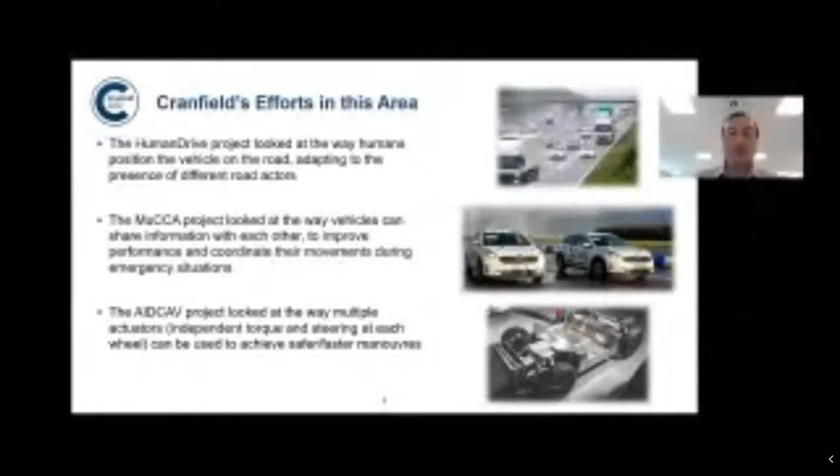And finally, we're going to look at the AIDCAV project, which looks at the way multiple actuators, typically controlling the torque and the steering at each wheel, can be used to achieve safer and faster maneuvers.

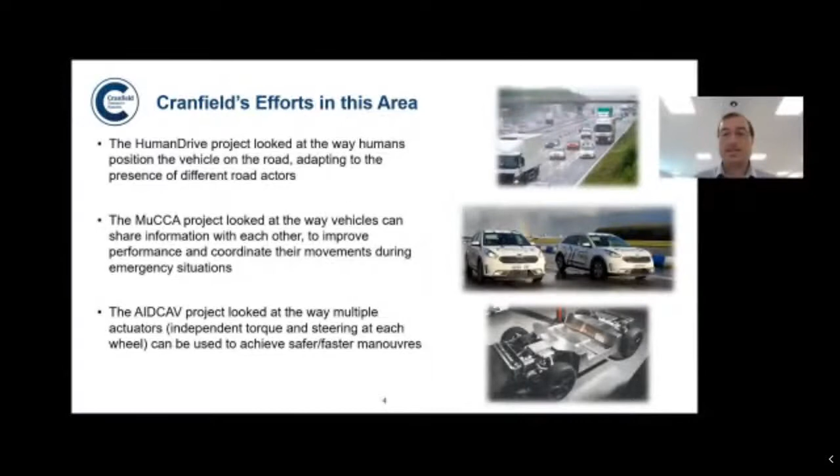So let's start with the HumanDrive project. This was a very large project that lasted for roughly 3 years and ended in March 2020. It was managed by a consortium of several companies, universities, and public bodies, with an overall budget of around £14 million.

The consortium was led by Nissan, and Nissan European Technical Center in particular, who led the development of the autonomous vehicle. The overall aim of the project was to develop an autonomous vehicle with human-like performance.

Hitachi, in particular, was in charge of developing the machine learning-based controller to mimic human-like trajectory planning and perception.

University of Leeds took advantage of their advanced driver simulator and ran experiments with hundreds of participants to understand how human drivers behave and to build a human driver model.

The Grand Drive was completed at the beginning of 2020, in the middle of winter, and therefore the vehicle had to deal with limited visibility due to reduced sunlight hours and all sorts of weather conditions, a typical grey winter day in England, as well as the many roadworks that characterize the M1 and the motorway system in general.

And of course, it was successful. You can find a video online with more information. The vehicle drove autonomously for almost all of the journey, apart from probably something like a couple of minutes along the whole journey when the driver had to take over in some particularly challenging situations, generally due to roadworks.

I'm going to show you a quick video that summarizes the output of the project. I'm going to enable the audio.

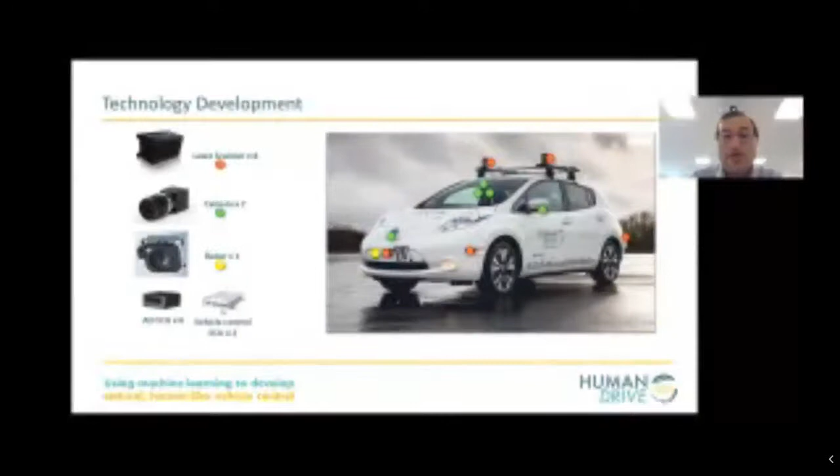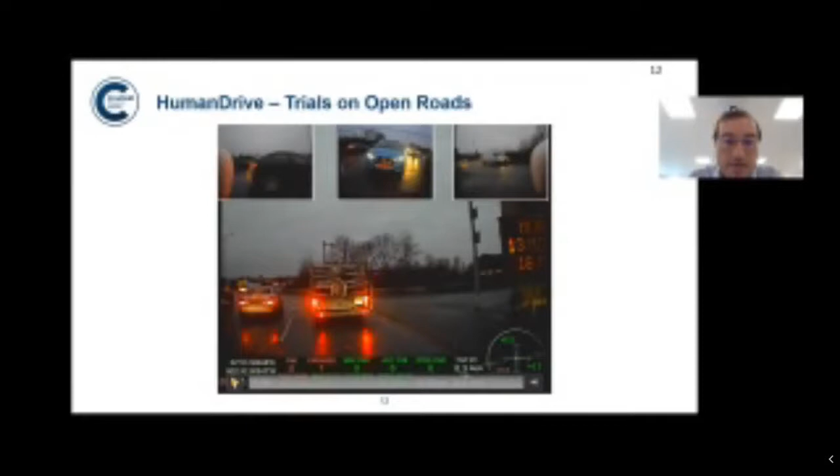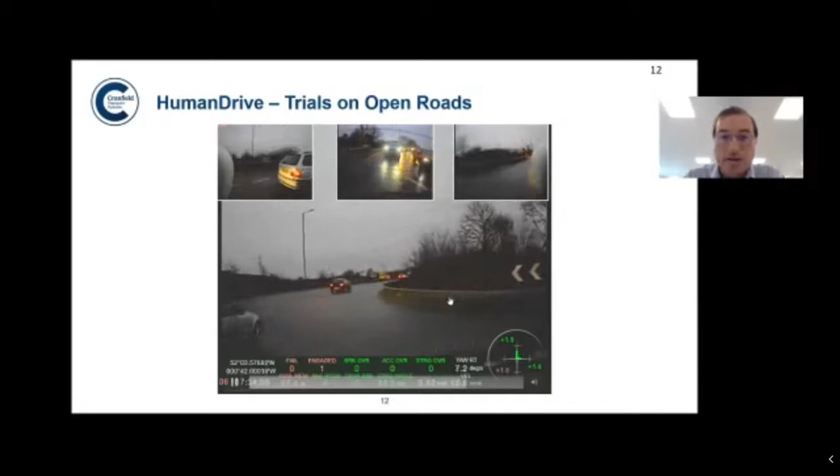I'll show you how the vehicle operates around a roundabout. This is a video taken during fully autonomous operation. If you keep an eye on the top right box, you see cars very fast approaching, going around the roundabout without necessarily indicating what they are doing. The vehicle stops, checks that the roundabout is clear, and moves ahead.

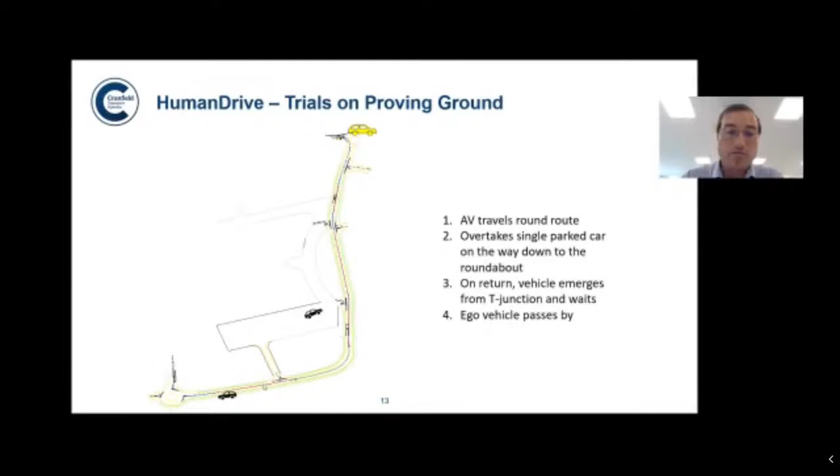Some of the interactions include a vehicle emerging from a T-junction, or overtaking a vehicle that is stationary in the middle of the road. We also had interactions with pedestrians crossing in front of the vehicle or moving along the vehicle.

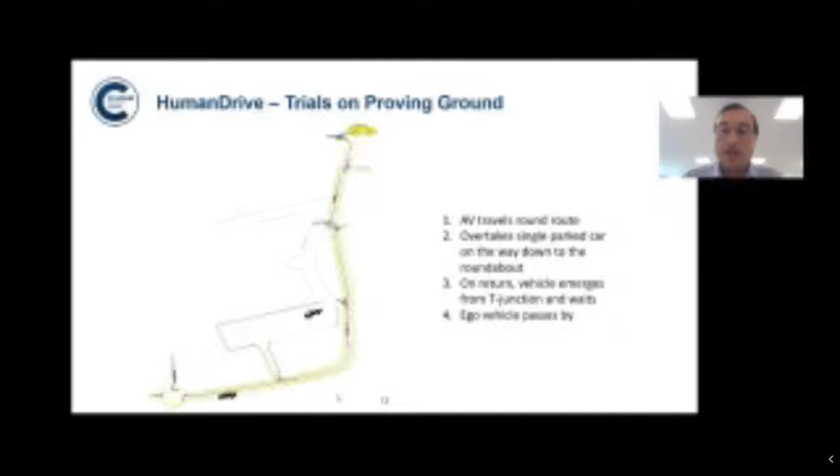Now I'll move on to the MuCCA project, whose focus is to develop a cooperative approach for connected and autonomous vehicles to handle dangerous situations, particularly to avoid collision.

The MuCCA project was managed by a consortium made up of 6 partners and led by IDIADA. IDIADA was responsible for the vehicle and electronics integration, the development of a custom vehicle control unit, and the development of software and testing of the overall systems.

Cranfield was responsible for developing algorithms for sensor fusion and collision avoidance, and for developing a human driver model and modeling the vehicle dynamics of the chosen autonomous system. Cosworth was in charge of the perception system, Connected Places Catapult for the systems engineering, Westfield for the testing oversight, and Secure by Design was working on cybersecurity.

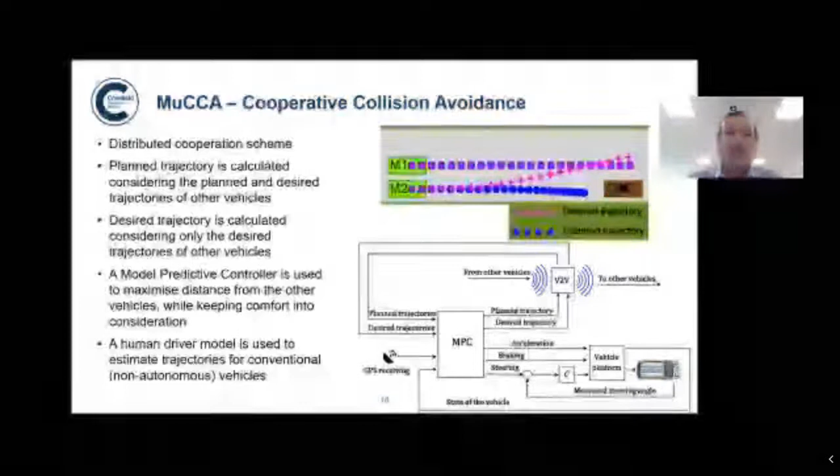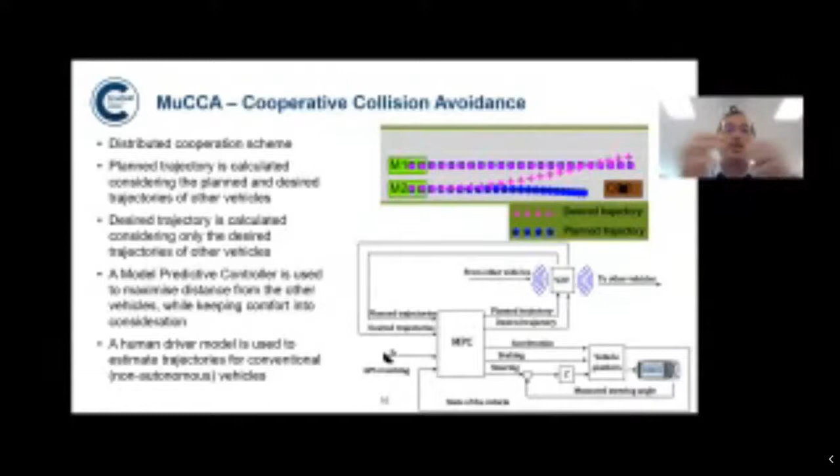With this slide, I would like to explain roughly how the system we developed works. We want to deploy the system on future autonomous vehicles, and we cannot establish a hierarchy across vehicles on the road. So it should be a distributed system where every car counts equally and is not coordinated by a supervisory controller.

We were inspired by the way human drivers negotiate difficult situations. They use the turning indicator to communicate a desired maneuver, but they also have a backup plan in mind in case the traffic around them cannot move out of the way.

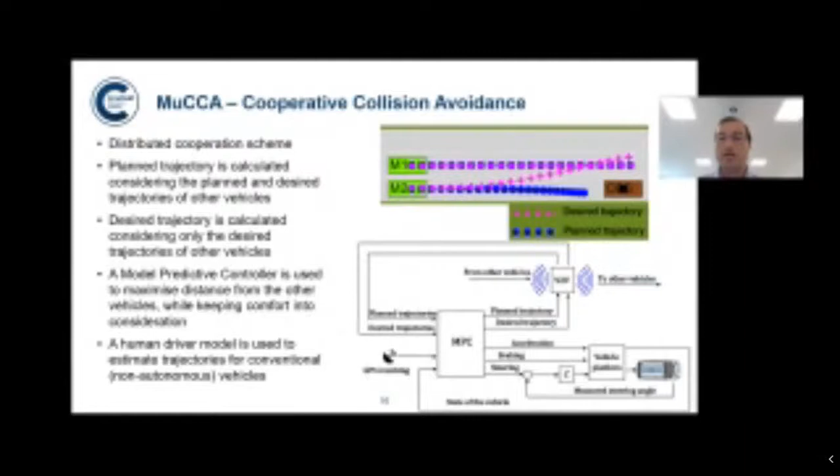We developed a system with two trajectory planners in each vehicle. One calculates a planned trajectory, assuming all vehicles around maintain their trajectory. At the same time, another controller calculates a desired trajectory if the vehicles around were allowed to move. The planned trajectory considers the planned and desired trajectories of other vehicles, while the desired trajectory only considers the desired trajectories of other vehicles. This allows us to cascade forward the desire of multiple cars to move in a given direction.

I'll give you a simple example, looking at the use case on the top right, where we have two cars driving on a multi-lane road like a motorway, and initially the lanes are free. Both cars have a desired trajectory and a planned trajectory that goes straight ahead.

Then M2 starts approaching an obstacle, and the planned trajectory begins to plan a braking maneuver in front of the obstacle, because there is a car on the left of M2 and it's not possible to move that way. At the same time, it broadcasts the desired trajectory to move left.

M1 receives both of these trajectories and checks whether it can accommodate the desired trajectory of M2. In this simple case, there's no one on the lane to the left of M1, so it can directly plan a new trajectory that gives space to M2. It then communicates this to M2, which can enact its originally desired trajectory, which becomes the new planned trajectory.

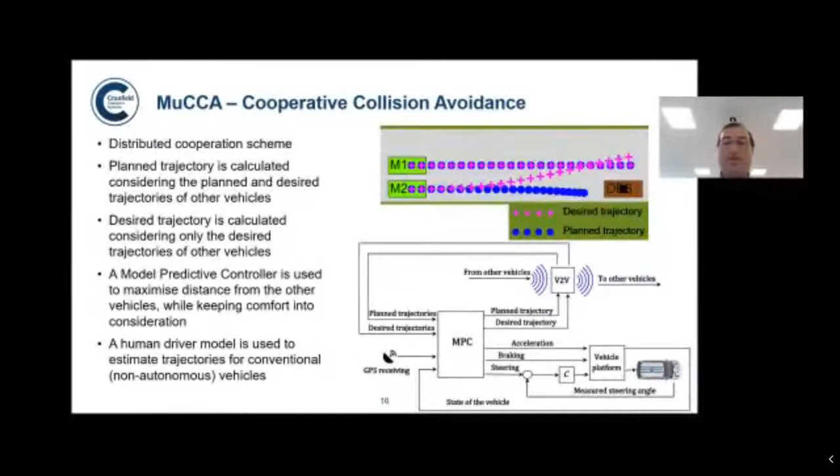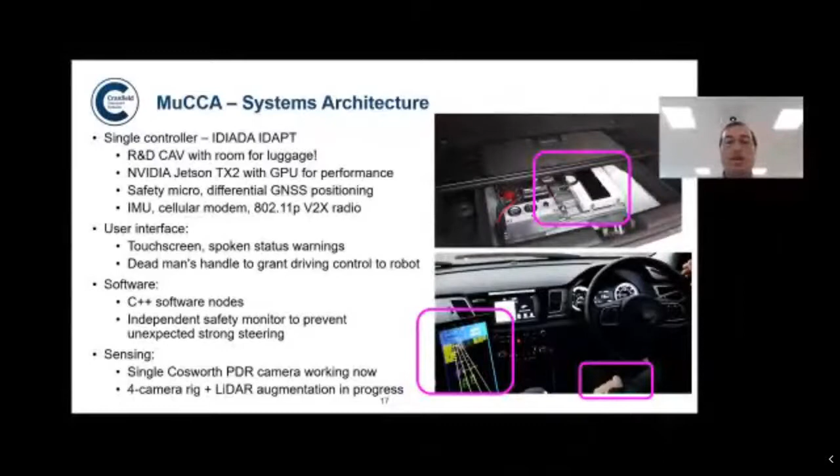I'm just going to give you a brief overview of the system architecture. It was focused on a single controller developed by IDIADA, very small, could fit in the well of the spare wheel, was based on an NVIDIA Jetson, containing a safety micro, differential GNSS positioning, and an inertial measurement unit, cellular modem, a Wi-Fi system, and V2X radio.

I'm just going to close with the video of the final demonstration. I hope you like it.

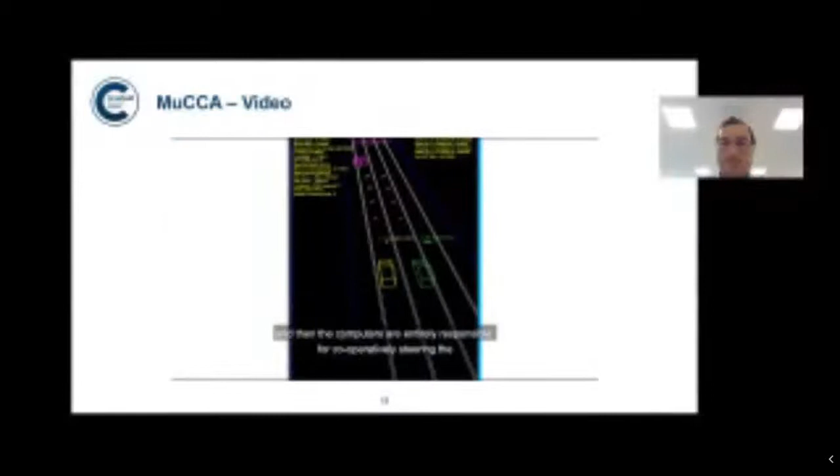Vehicles approaching some dummy obstacles. For the sake of this trial, what we do is set up the situation using safety drivers, then they both hand over control to the computers. MuCCA has control. Then the computers are entirely responsible for cooperatively steering the cars round the obstacles, working together, using their vehicle-to-vehicle radio links until the scenario is complete.

This is the first time that anyone has demonstrated full-size cars working cooperatively together. It's like a hive mind or a shoal of fish, avoiding collision. Here we just have two connected research vehicles, but in future, all vehicles on the road can be connected, and the implication of that is that they can work together for cooperative collision avoidance like this.

About 1,500 people a year die on the UK roads, and our objective is to reduce that number through automated collision avoidance of a really advanced kind. The MuCCA Project is funded by the UK government, by the Centre for Connected and Automated Vehicles, with a total budget of £4.5 million. We've been running for 2.5 years now, so these tests are the very culmination of the project.

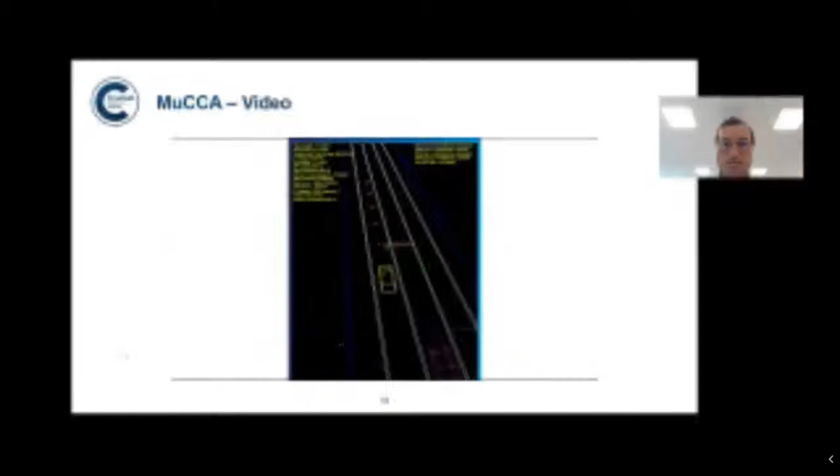The partners to the project.

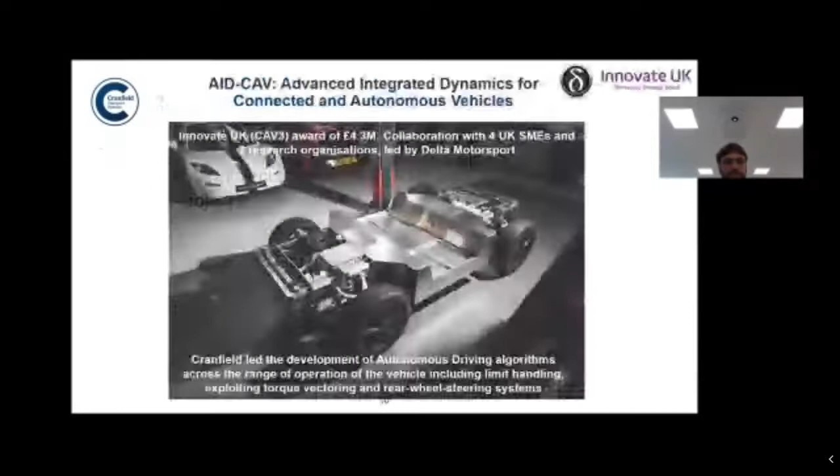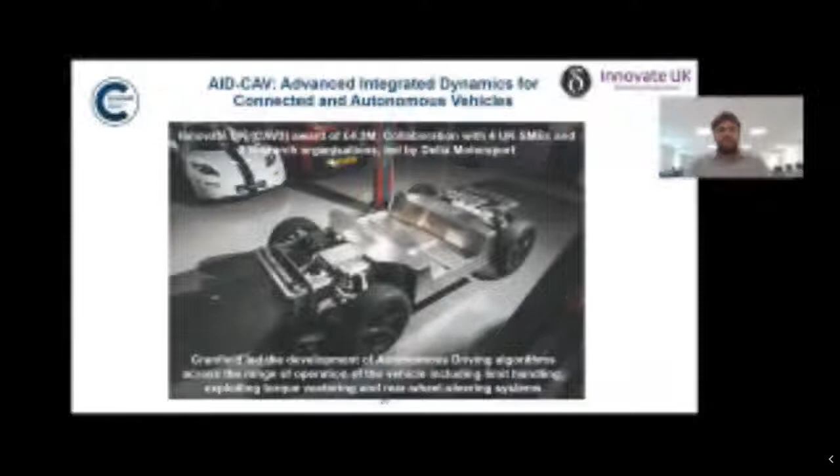This is a project that was funded by Innovate UK through the CAV3 funding competition. The name of the project is AID-CAV, which stands for Advanced Integrated Dynamics for Connected and Autonomous Vehicles. The project was led by Delta Motorsport, one of our collaborators that we've worked with in previous projects as well. The project brought together 4 UK SMEs and 2 research organizations with the aim of delivering novel technologies in the area of actuation of autonomous vehicles, namely the development of drive-by-wire, steer-by-wire, brake-by-wire technologies.

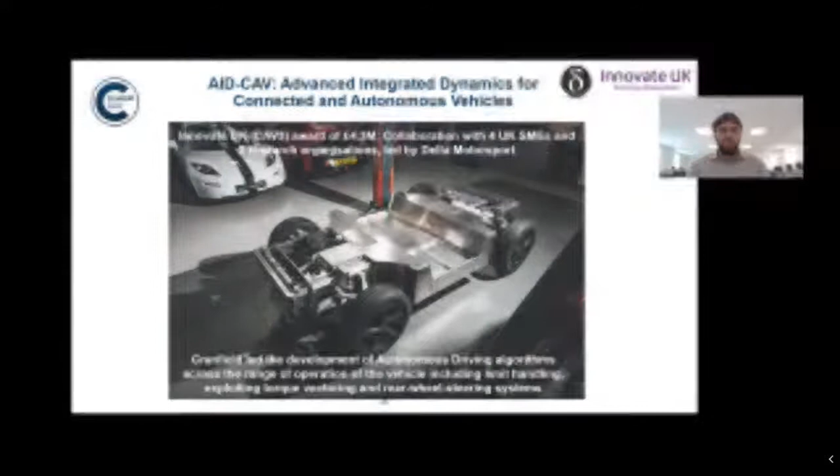At Cranfield, we were responsible for the development of control algorithms to deliver path-following control, the lower level of the autonomous vehicle control hierarchy, which takes advantage of the available actuation. In this particular case, we're talking about independent steering of the front and rear axles, as well as independent torque control, which is commonly known as torque vectoring. In addition, we are looking at developing controllers which are capable of controlling the autonomous vehicle in extreme operating conditions, including the limit of handling.

Just a few words about the motivation behind our work. The introduction of several actuations within the chassis of the vehicle, such as differential braking, torque vectoring, active differentials, front and rear steering, and so on, has mainly been done in the context of human-driven vehicles and has enabled the development of active safety systems and advanced driver assist systems with very important impact on the safety of passenger vehicles.

At the bottom right side, you can see a depiction of the classical electronic stability control, which uses independent braking of each of the 4 wheels in order to eliminate excessive understeer and oversteer of the vehicle during emergency cornering. So the introduction of these several actuators has been used for many, many years. A lot of those systems, most of those systems, share a common feature, which is effectively that they aim at delivering stable, intuitive, predictable behavior of the vehicle for the average human driver.

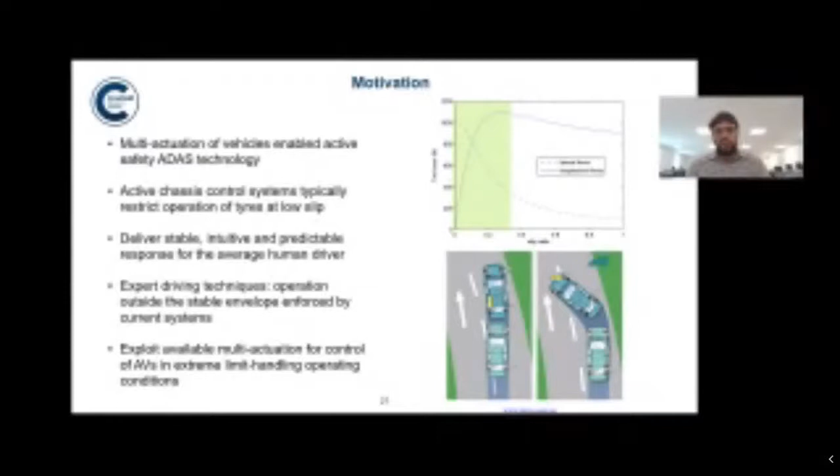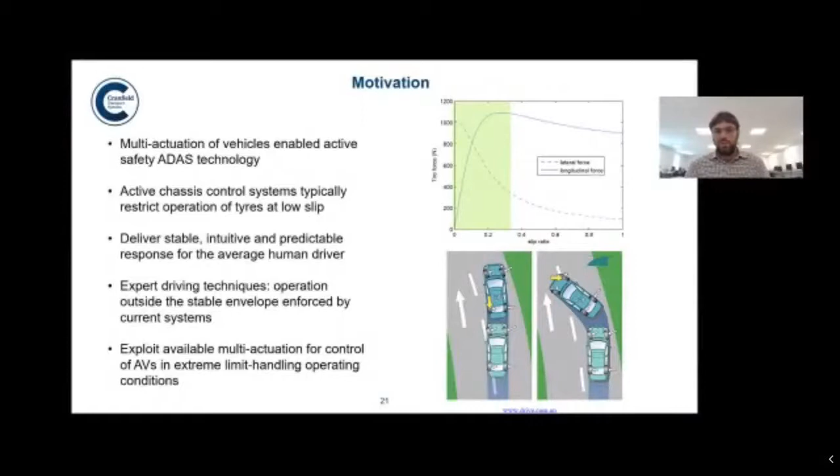This is typically achieved by limiting the operation of the tire within low slip conditions, as depicted on the top graph, the green highlighted area within the typical tire force versus slip characteristic.

So the question we are asking here is: when we remove the human driver from a highly automated, driverless vehicle, is it still sensible to develop systems that limit the vehicle's behavior to deliver an intuitive response for the average human driver? Or should we be looking at creating controllers with expert knowledge of vehicle dynamics and expert skills in controlling them?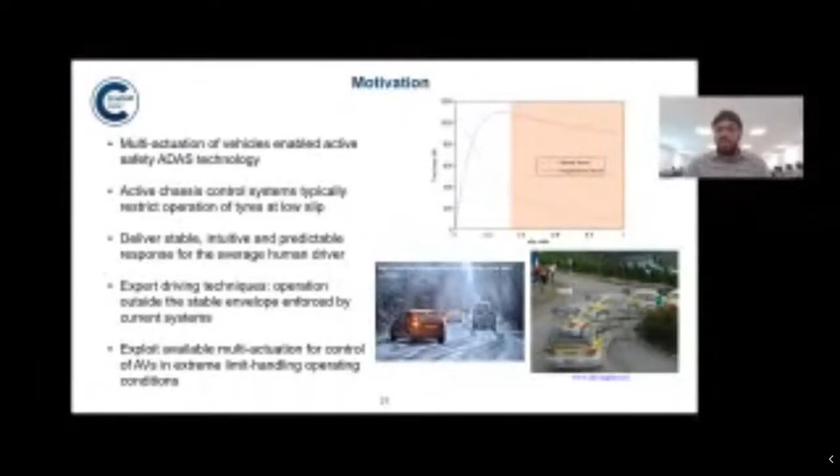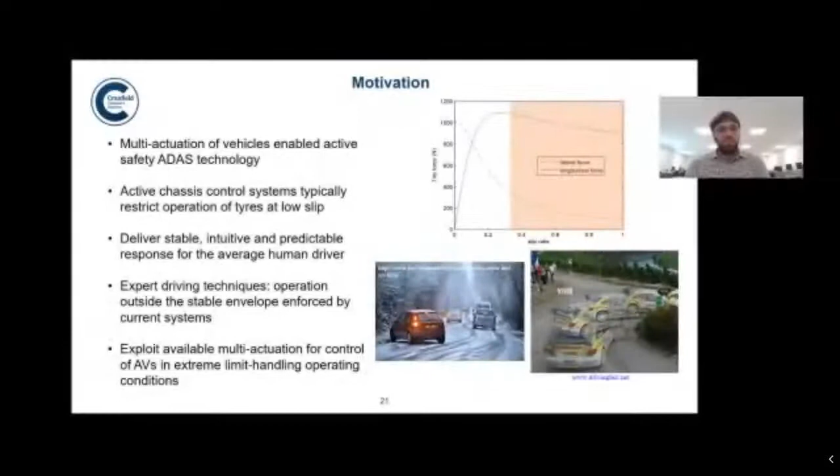Not necessarily to drive in a racing environment, but effectively to drive the vehicle safely in adverse conditions where the limits of handling are quite low. So in this project, we're looking at exploiting the available multi-actuation, the available control authority of modern vehicles, in order to control autonomous vehicles in extreme limit handling operating conditions.

For instance, we may wish for the controller to deliver tracking of a path at a particular reference speed. And in our work, we also extended that task to following further states of the vehicle, such as the side slip angle.

The context here is to exploit the available actuation. So we're looking at control design, a multivariable control design. We need a control synthesis which is able to operate with a vehicle at the limit of handling, in the presence of important nonlinearities and constraints.

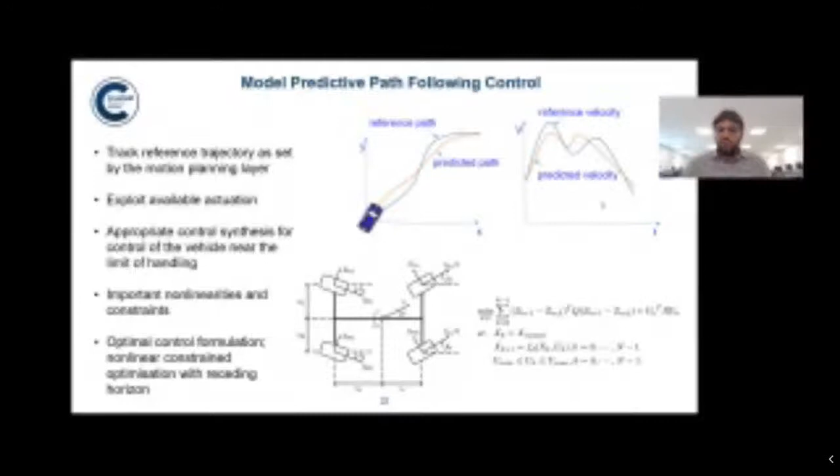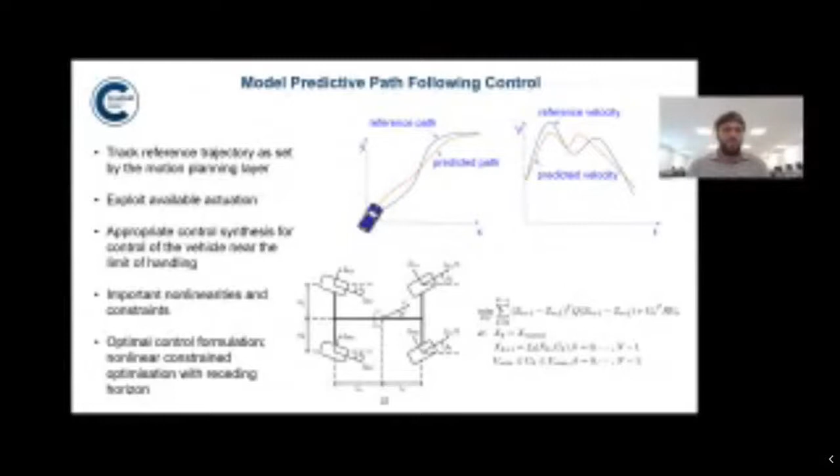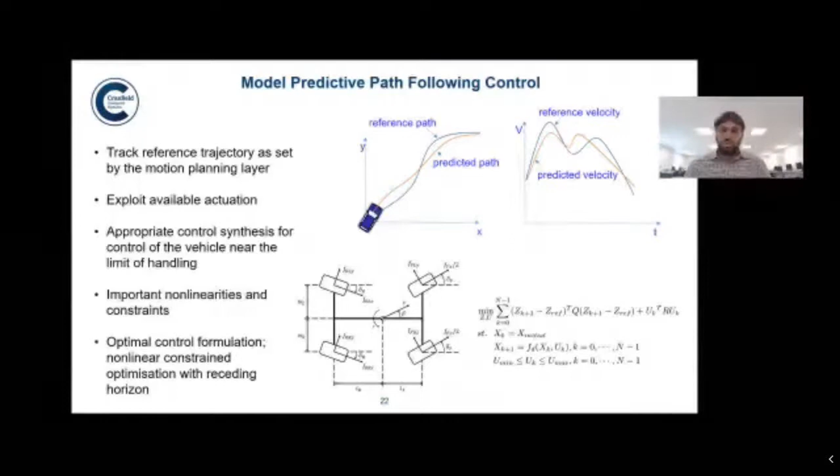Hence, we decided to develop our controller in the context of model predictive control. This is an optimal control formulation, solved in a receding horizon, nonlinear constrained optimization fashion. We decided on this approach because we are able to incorporate the nonlinearities of the vehicle dynamics, incorporate multiple control inputs for the multi-actuation requirement, and also accommodate important constraints.

This is an overview of the development framework, starting from model derivation. This is an extremely important step because we are looking at a real-time optimization solution. The model needs to deliver accurate information about the limit behavior of the vehicle, and it also needs to be efficient and of low enough order to allow real-time calculations and optimization.

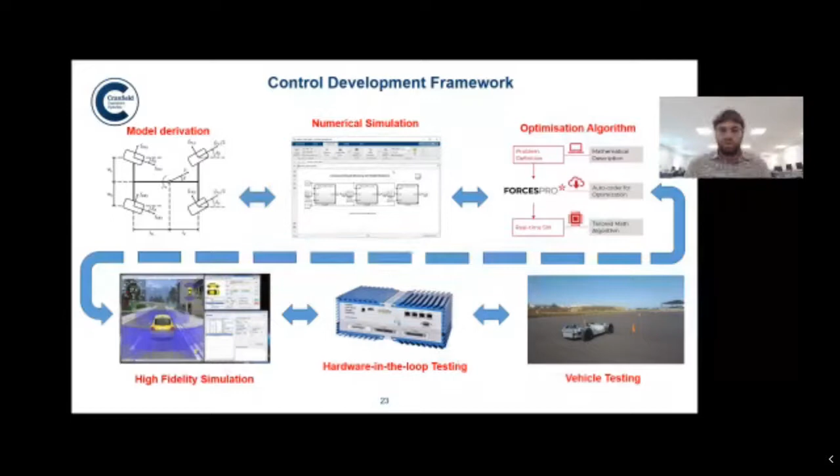These models were developed in a simulation environment using MATLAB and Simulink. We incorporated the state-of-the-art optimization algorithm provided by Embotech, called Forces Pro. Before we moved to real testing, we did a lot of validation in high-fidelity simulations such as CarMaker, and validated the real-time applicability of the controller using hardware-in-the-loop testing. Finally, we performed extensive testing at our own facility, part of the vehicle testing grounds at Cranfield, which allows for vehicle dynamics testing.

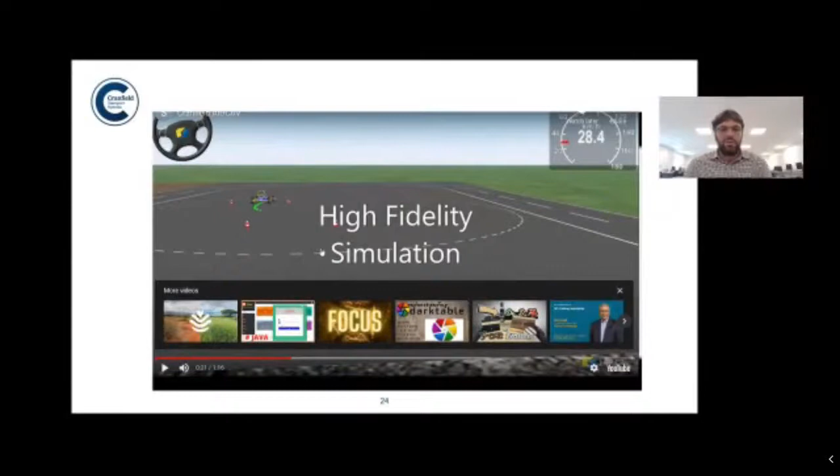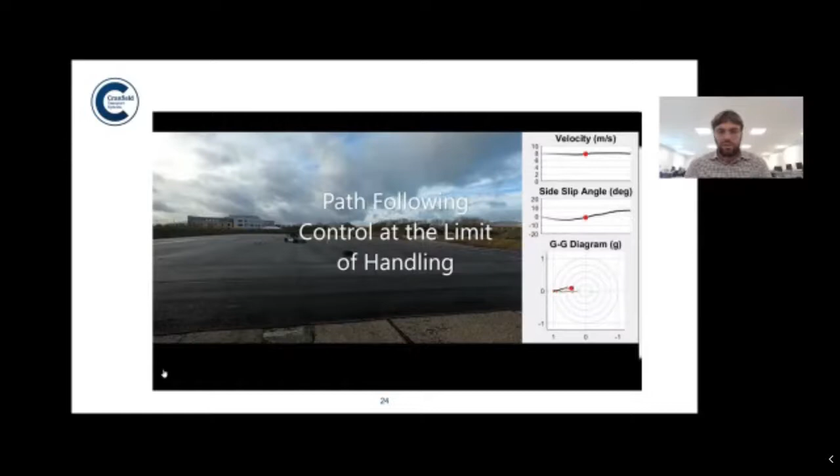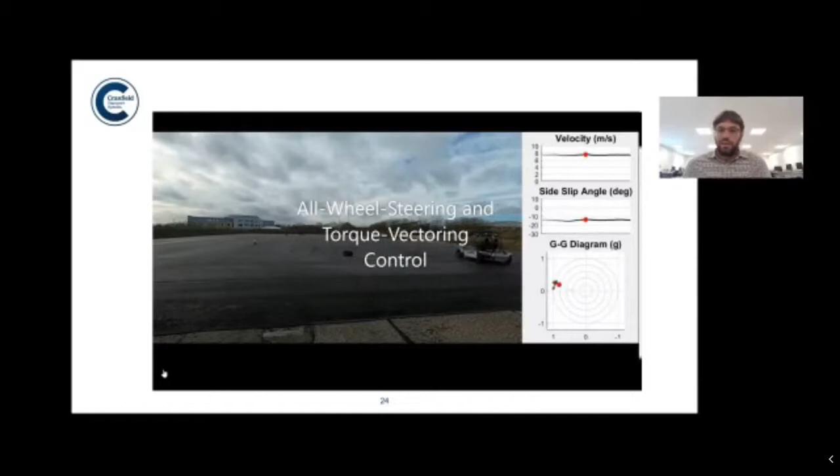First, you will see some visualization of the simulation results. We were able to create effectively a digital twin of the facility and design our testing maneuvers in this simulation environment. You will see the same maneuver being executed by the vehicle on the right hand side. You can see some important information: the vehicle velocity, the side slip angle, and also the acceleration diagram.

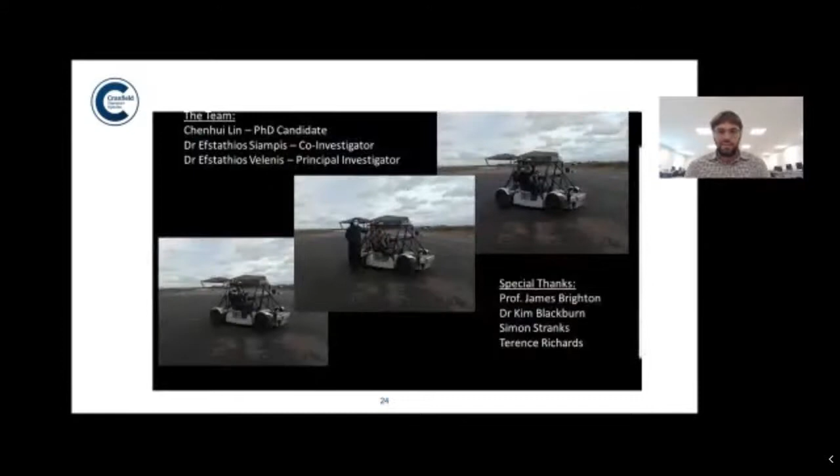So for this last handling test, the typical constant radius test, we were able to deliver the desired function, demonstrating the advanced capabilities in control of the limit handling of the vehicle with our controller. So let me swap back to audio.

And so this was a short overview of the IMechE project. May I move quickly then to addressing the skill gap.

I can introduce some information about our teaching activities at Cranfield University. Perhaps you are aware that Cranfield University is unique in being a solely postgraduate university in the UK. And within our group, the Advanced Vehicle Engineering Center, which is divided into 4 core sectors: automotive, motorsport, intelligent mobility, and off-road dynamics, we offer 5 specialized MSc programs, namely automotive engineering, which is the first of its kind in the country, and it's run now for nearly 60 years.

More recently, we introduced the automotive mechatronics program, for which I'm the course director. We have the advanced motorsport engineering program, which also runs for, I believe, around 30 years, and more recently, the advanced motorsport mechatronics program. Only last year, we introduced the connected and autonomous vehicle engineering MSc, which specifically focuses in this particular area. So between the automotive mechatronics and the connected and autonomous vehicle engineering MSc, we address some of the key areas of training and skills that engineers need to develop in order to address the area of technology development in autonomous and connected vehicles.

The automotive mechatronics program effectively has 40% of its credit value assigned to the taught part, which includes core automotive engineering topics such as vehicle dynamics, powertrain, vehicle electrification and hybridization, and so on. And then there is a mechatronics specialization set of modules in modeling, control, embedded systems, and specific vehicle applications. On the right-hand side, you can see some of our facilities in tire testing, four-post rig, hardware-in-the-loop facilities, and so on.

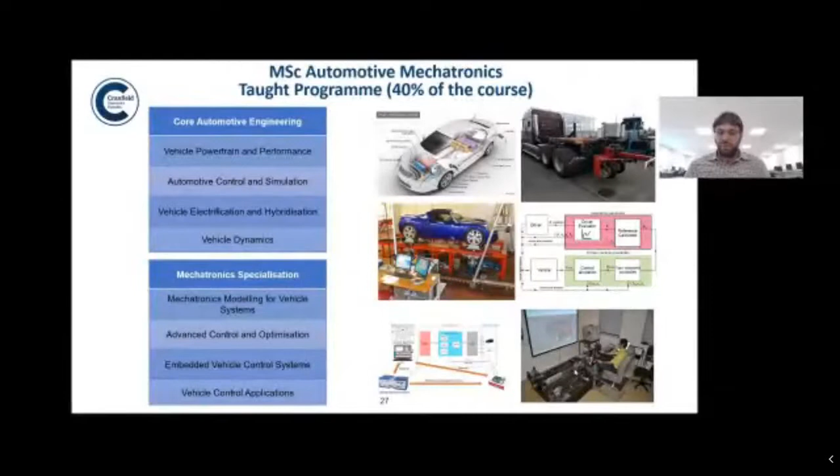One of the things that we put a lot of focus on in our programs is the project work, the group project and the thesis project, which we put a lot of emphasis on, such as most of the projects that we offer are in collaboration with our industrial contacts, who are able to deliver additional supervision, access to facilities, access to data according to the particular need.

Being conscious of the time, I think I will just move on to the next slide, and I will invite back Marco, who is one of the course directors.

Hello again. So yeah, as Statis said, I'm the Deputy Course Director for the MSc in Connected and Autonomous Vehicle Engineering. Most of the qualities that Statis mentioned apply across our courses, actually. And I'm going to add a few more qualities that also apply across our courses.

So we do our best to provide hands-on experience with vehicle prototypes on our proving ground, and to engage with relevant businesses through the usage of an industrial advisory board that we form for both our automotive courses and our motorsport courses.

And effectively, we invite members of industry to attend the event at the end of our group design project, where we present the outcome of the project, and another event at the end of the individual research projects, where each student presents a poster generally of their work. And we also have a short session with the board to gather feedback about the areas that we are teaching and whether we should align them better with their needs.

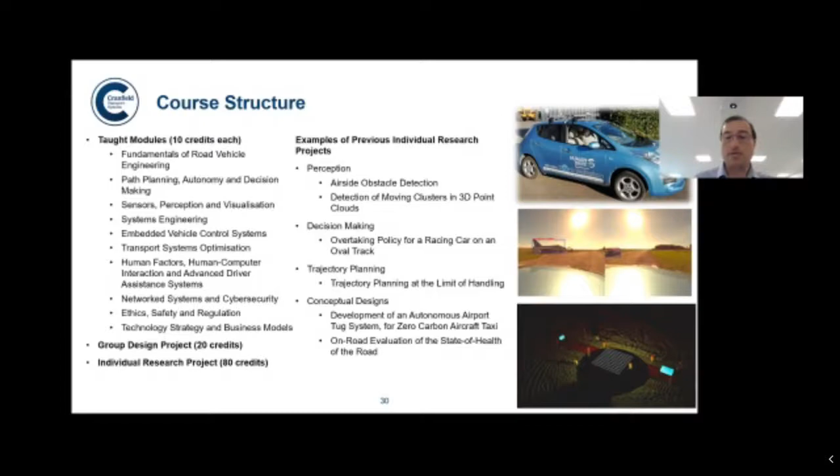And just to give you an idea of what our students covered, we've done work on perception, on airside obstacle detection of moving clusters in 3D point cloud. We worked on decision making, like overtaking policies for racing cars on an oval track. We've done trajectory planning at the limit of handling, and we've done some conceptual design for autonomous tug systems for aircraft, or on-road evaluation of the state of health of the road. And that brings our presentation to the end.

So please, excellent, thank you very much. That was really interesting. I'm not an expert in autonomous or connected vehicles myself, so I found that fascinating. I spent my career at Ford in a more conventional vehicle environment, so that was really interesting. Thank you very much, gentlemen, that was an excellent coverage.

Are you okay if I pose you some questions now? Yeah, absolutely, we have quite a few. They're all fairly specific to the topic, I think, so I'll try and get through as many as I can. First one is from John Hambley.

He asks, autonomous vehicles need a significant amount of real-time, high-performance computing. The electrical power requirement is significant. Will battery capacity in future electric vehicles be a barrier to the adoption of autonomy?

I think the power requirements to power the powertrain greatly dominate the power consumption for batteries. So I think the power required by the autonomous system would not be very significant, comparable to the power used by the air conditioning. Do you have a figure for actual power, or a target the system would consume, in watt hours per kilometer? It varies greatly, but I would be surprised if it exceeded 1 kilowatt. I'm not aware of any autonomous vehicle that takes more than 1 kilowatt for the autonomous system. Okay, so 1 kilowatt hour per hour would be quite modest compared with the propulsion power. Very good, thank you. That's a good question.